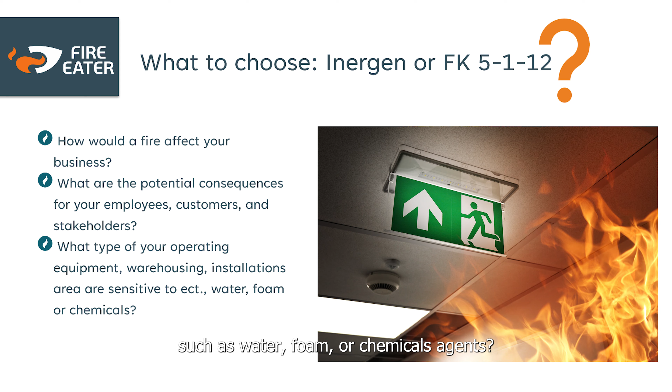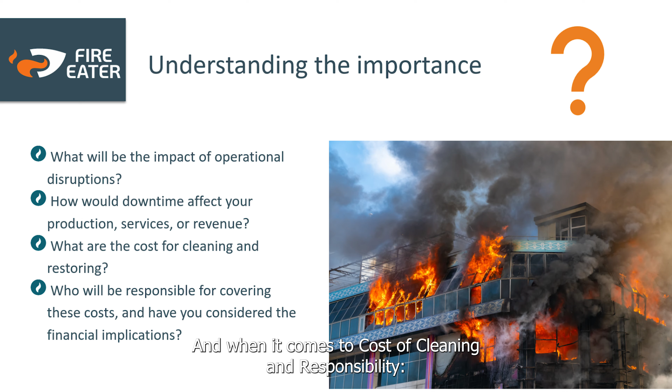And when it comes to cost of cleaning up and responsibility, what is the estimated cost of cleaning and restoring your protected area after an activation of a fire extinguishing system? Who will be responsible for covering these costs? Have you considered the financial implications? Addressing these questions will enable you to make an informed decision when choosing between Inergen and chemical agents.

Each system has its pros and cons. But before we begin to compare the two types of systems, let's start by looking into the characteristics of the systems.

And how does an Inergen system work? Inergen is an inert gas consisting of nitrogen, argon, and carbon dioxide. It's an extinguishing agent released as a total flooding method, resulting in a three-dimensional extinguishing effect.

Releasing Inergen to the protected area will decrease the oxygen content and suffocate the fire without leaving residue or causing damage, making it suitable for protecting sensitive equipment and occupied areas. It's an environmentally friendly and safe alternative to traditional firefighting methods.

And how does an FK5112 system work? FK5112 is a chemical compound and belongs to a group of fire suppression agents known as clean agents. It's designed to quickly extinguish fires in areas where water or traditional firefighting foam may be ineffective or damaging to sensitive equipment, such as computers, servers, data centers, and other critical electronic or valuable assets.

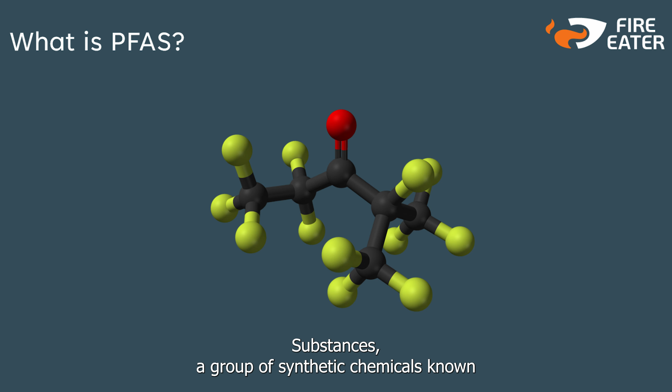FK5112 is per definition a PFAS. What is a PFAS? PFAS stands for per- and polyfluoroalkyl substances, a group of synthetic chemicals known for their resistance towards heat, water, oil, and others. They've been widely used in products like firefighting foam, stain and water-resistant fabrics, non-stick cookware, and more. However, the use of PFAS is concerning due to their persistence in the environment and potential health risk, leading to increased regulations and efforts to phase them out in various applications.

What we know for sure: PFAS will be phased out. Let's discuss the phase-out of PFAS, or per- and polyfluoroalkyl substances. As I said before, FK5112 falls under the category of PFAS. One significant development is that one of the largest PFAS suppliers has announced their intention to exit production and completely discontinue the use of PFAS across their product line by the end of 2025.

While PFAS is still allowed for certain applications, it's worth noting that the refilling and expansion of installations using PFAS may pose challenges in the future. Historically, during previous phase-outs of damaging firefighting agents, like halons, regulations became progressively stricter over time. Additionally, it's important to mention that the availability of PFAS varies by country.

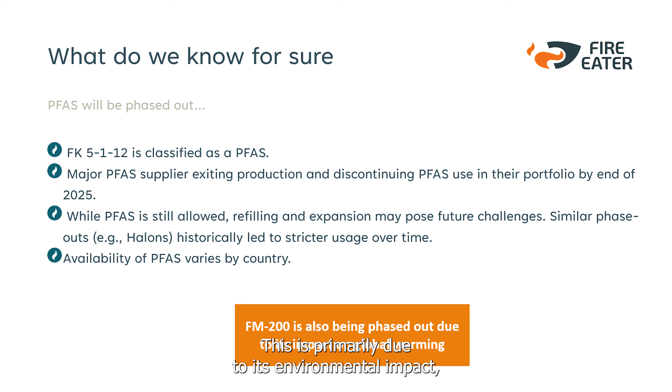Moving on to FM200, it's also in the process of being phased out. This is primarily due to its environmental impact, particularly its contribution to global warming. It has started with a 10% reduction in 2022 and will eventually be reduced by 85% by the end of 2036, according to the schedule outlined in the American Innovation and Manufacturing Act.

In-depth analysis: Inergen versus FK5112. This is a schematic presentation highlighting the similarities and differences between the two types of fire extinguishing technologies. This visual overview offers a comprehensive look at the two techniques.

Inergen fire protection utilizes an inert gas, IG541, to displace oxygen, preventing combustion. It's a gas-based suppression technique. FK5112 works by removing heat from the fire, disrupting the combustion process, and extinguishing flames.

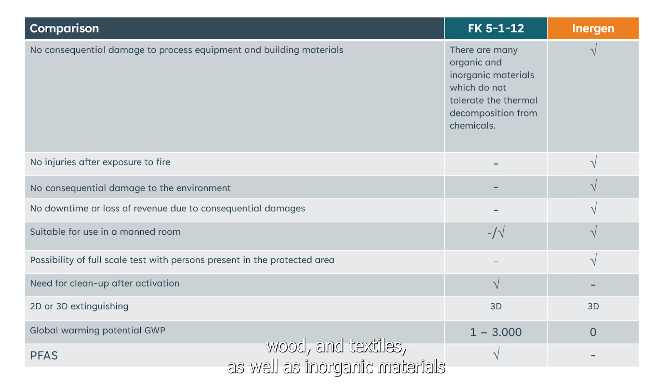Inergen systems leave no damage to process equipment or building materials, as they do not produce residues or cause corrosion. FK5112: numerous organic and inorganic materials are sensitive to thermal decomposition when exposed to certain chemicals. For example, organic materials like polymers, paper, wood, and textile, as well as inorganic materials such as metals, ceramics, and glass, may not withstand thermal decomposition under certain conditions.

No injuries upon exposure after fire extinguishing. Inergen is non-toxic, and people can safely remain in the protected area after fire suppression. FK5112 can be toxic after exposure to heat and fire.

Environmental impact: Inergen has no environmental impact and a zero contribution to global warming potential and contains no PFAS. FK5112 has environmental impact and contributes to global warming potential.

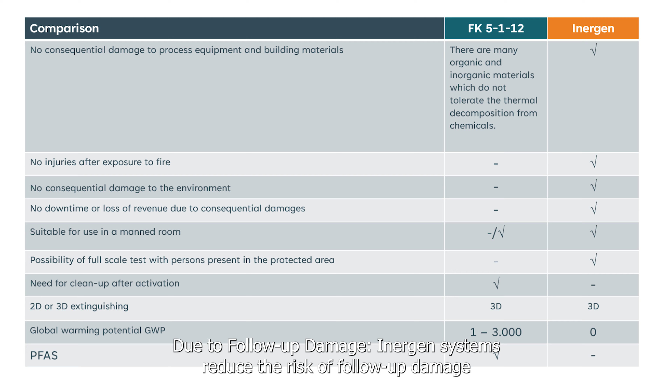No downtime or revenue loss due to follow-up damage. Inergen systems reduce the risk of follow-up damage and require minimal downtime and revenue loss after a fire. FK5112 requires cleanup and cleaning after activation.

Suitable for use in manned spaces: Inergen is suitable for use in areas with people present, ensuring their safety due to its non-toxic nature.

FK5112 is approved for use in manned spaces, but due to recent investigation that has confirmed the presence of PFAS, there are concerns about the opportunity for full-scale testing with persons present. Inergen systems allow for full-scale testing with people present, as the gas is non-toxic.

FK5112 is a PFAS which is harmful to humans, and there is a need for cleanup after activation. Inergen typically requires no cleanup after system activation, as it leaves no residues. FK5112, by contrast, does require cleanup.

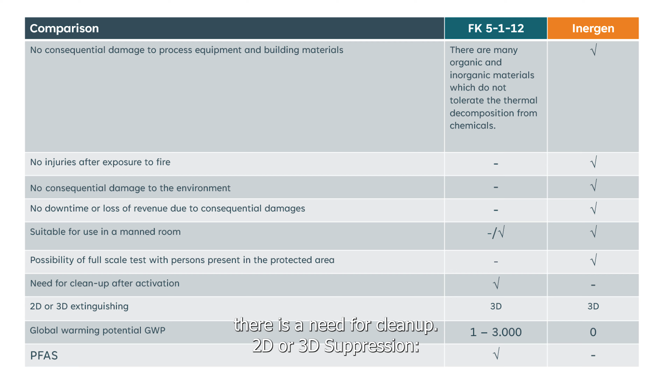Regarding 2D or 3D suppression: Inergen is a three-dimensional fire suppression solution that fills the entire room, including cabinets and server racks. FK5112 behaves in a similar manner as Inergen.

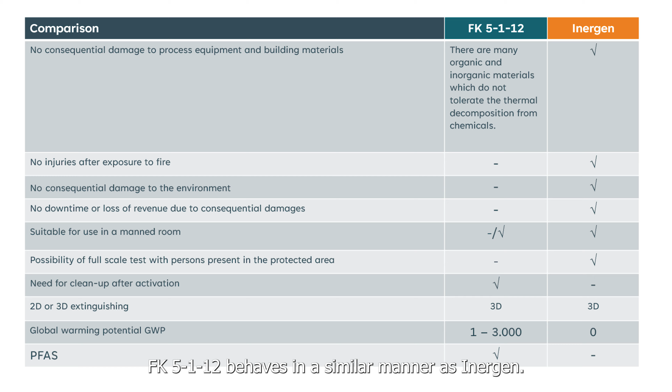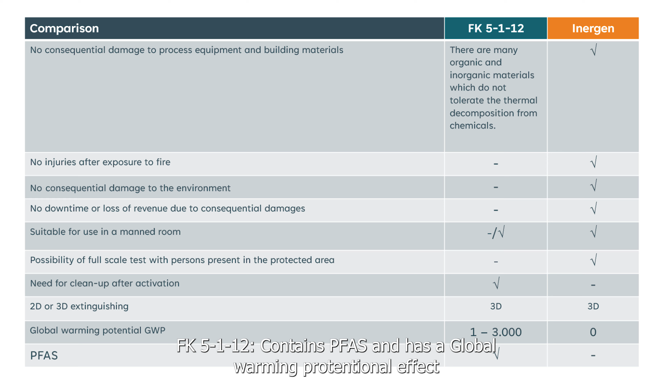On global warming potential and PFAS: Inergen has no global warming potential and does not contain PFAS, making it environmentally friendly. FK 5-1-12 contains PFAS and has a global warming potential effect of 1 to 3,000.

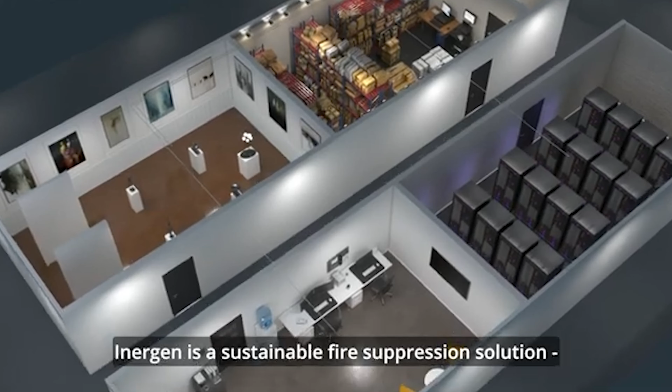Inergen is a sustainable fire suppression solution exclusively consisting of natural elements from the air we breathe: 52% nitrogen, 40% argon, and 8% CO2. A blend that extinguishes fire without consequential damage to the protected area, people, or the environment.

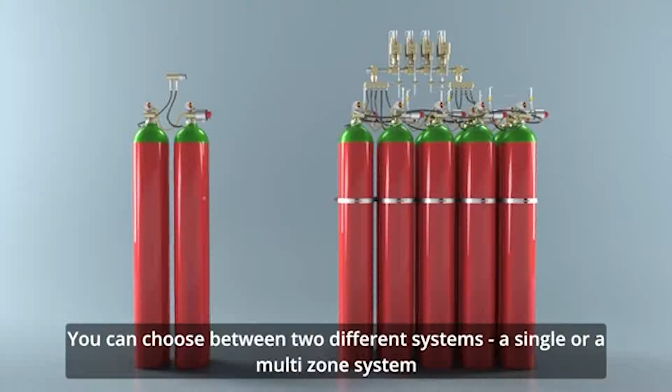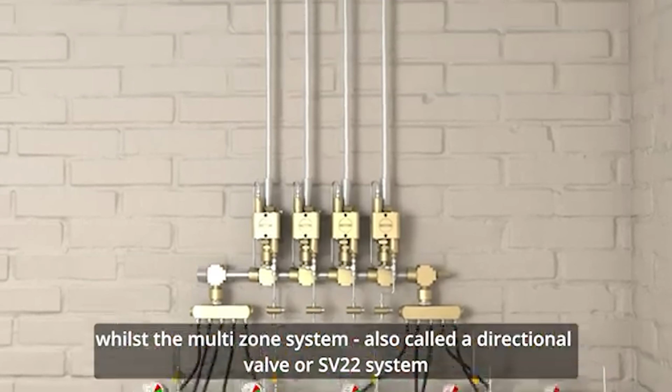You can choose between two different systems, a single or a multi-zone system, depending on the area or object to be protected. The single system, also called a standalone system, protects one single room, whilst the multi-zone system, also called a directional valve or SV22 system, protects several zones at the same time, with a shared cylinder bank dimensioned to protect the largest zone in the protected area.

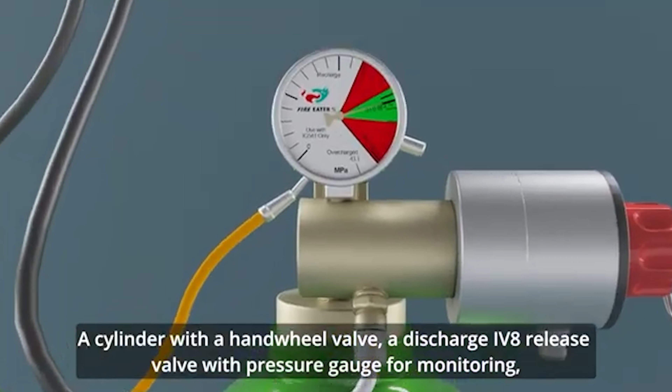The standalone system consists of a cylinder with a hand wheel valve, a discharge IV8 release valve with pressure gauge for monitoring, a solenoid with electrical activation, as well as hoses, manifold, nozzles, and pressure relief dampers. In addition, the system has detection in the form of a smoke detector, control panel, alarm tableau, and discharge call point.

In the event of an alarm on one of the two detectors, the ventilation in the room ceases immediately, while the alarm is awaited from the second detector in the room. After activation of the second detector, the system will start a preset countdown.

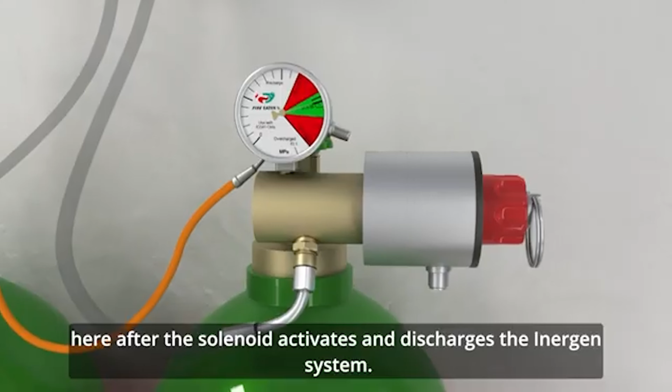After the solenoid activates and discharges the Inergen system, the Inergen will be released from the IV8 discharge valve and will travel through the discharge hose up to the manifold. Activation of the remaining cylinders will occur through back pressure from the manifold. The Inergen is discharged through a network of pipework to provide a uniform concentration of Inergen throughout the risk.

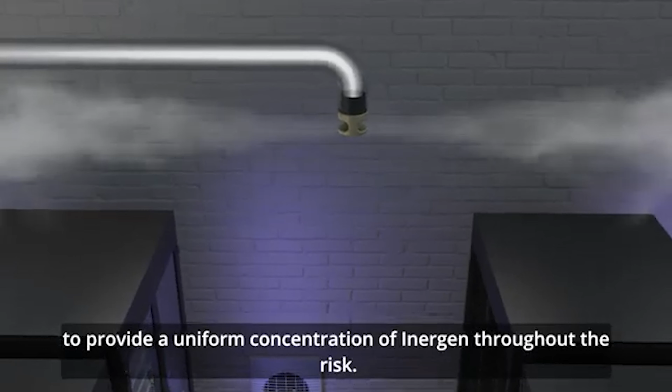In addition to the components in standalone, the SV22 system consists of a series of zone valves and an SV-CIV starter kit. In the event of an alarm, the SV22 system's first actions follow the same procedure as the standalone system until the Inergen system is activated.

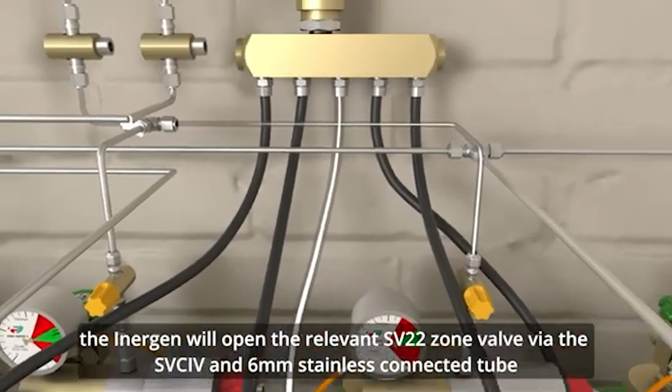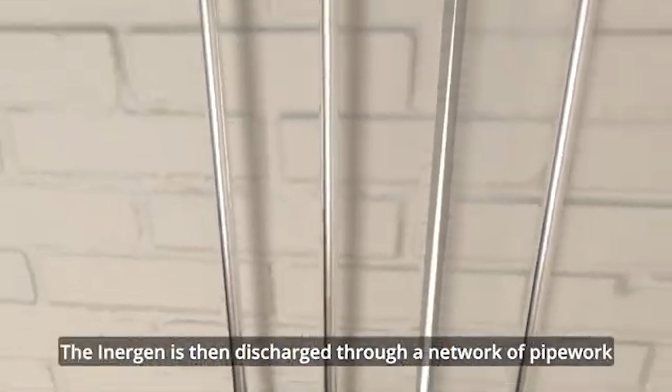Subsequently, the Inergen will be released from the IV8 discharge valve and will travel through the discharge hose. The Inergen will open the relevant SV22 zone valve via the SV-CIV and 6mm stainless connected tube, and thereby open the correct zone SV valve. The Inergen is then discharged through a network of pipework to provide a uniform concentration of Inergen throughout the risk.

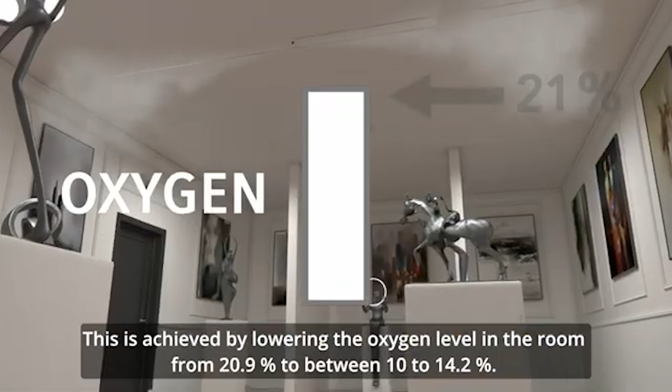It typically takes 40 seconds to extinguish the fire. This is achieved by lowering the oxygen level in the room from 20.9% to between 10 and 14.2%. The Inergen concentration is held within the risk, leaving no chance of further reignition.

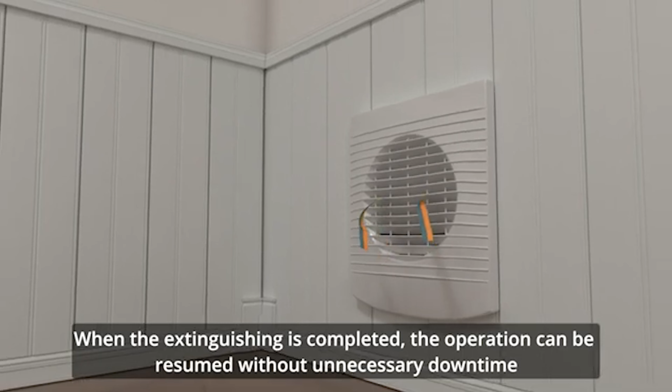When the extinguishing is completed, operation can be resumed without unnecessary downtime and consequential damage to either inventory or the building. Most importantly, the Inergen system is completely safe for people. After a fire, the standalone and the SV22 system can be easily restored, so that it is ready next time an incident could occur. Fire Eater: no fire, no danger, no damage.

Pros and cons of Inergen fire extinguishing systems: effective and reliable in confined areas. Inergen extinguishes fire by lowering the oxygen level in the protected area from 20.9% to around 12.5%, depending on local rules. The low oxygen level suffocates the fire before it develops.

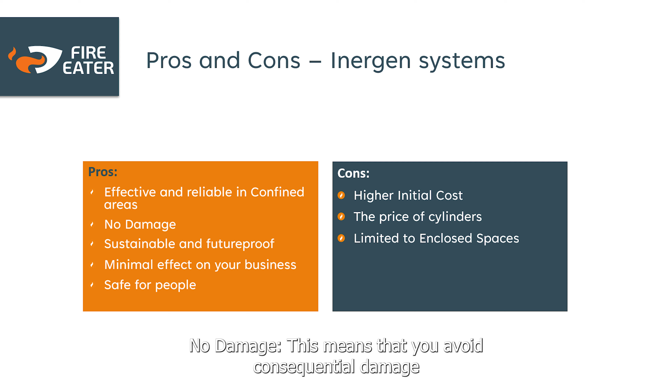No damage: this means you avoid consequential damage to building, interior, stock, data and process equipment, etc. Sustainable and future-proof: Inergen consists of natural gases. There's no impact on the environment when a system is activated, and no chemicals are used. This makes the greenhouse effect neutral, without any kind of impact on the ozone layer. We call this a sustainable solution, which also makes it future-proof.

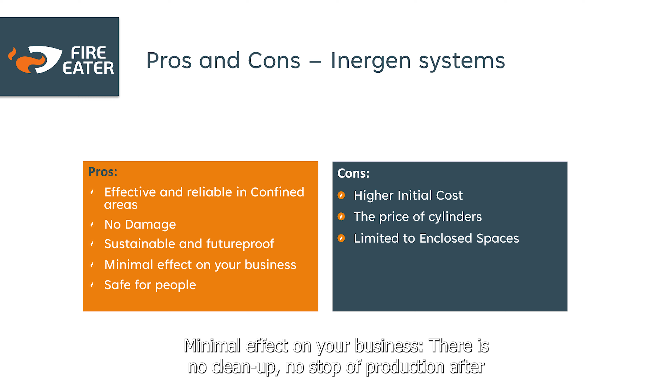Minimal effect on your business. There's no cleanup, no stop of production after an activation of an Inergen system.

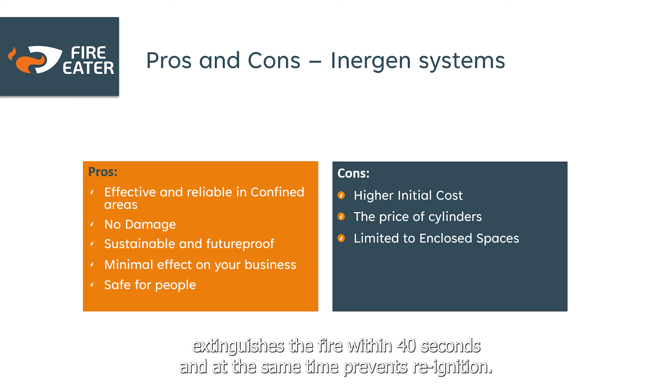If a fire occurs, the Inergen system is activated automatically and typically extinguishes a fire within 40 seconds, and at the same time prevents reignition. We recommend that you ventilate the room afterwards, and when this is done, you can continue as if nothing had happened.

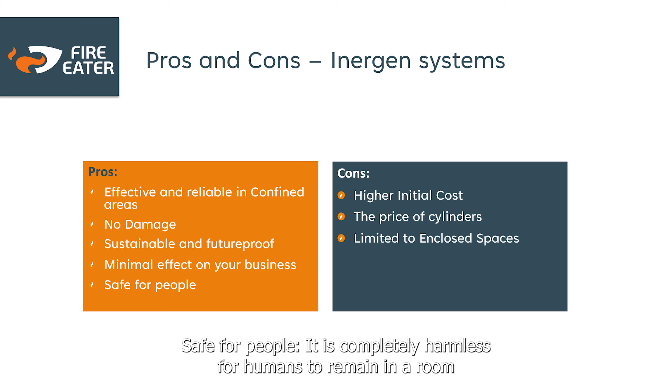Safe for people. It's completely harmless for humans to remain in a room when an Inergen system has been activated. You may find that you breathe a little deeper than you usually do. This is because your brain wants the same amount of oxygen as before the system was activated and the oxygen level lowered. It happens completely automatically, and most people don't even notice that it's happening.

Cons. High cost. Inergen systems can be expensive to install and maintain compared to some other fire suppression options.

Complex installation. Installation can be complex, and the system must be carefully designed for specific hazards.

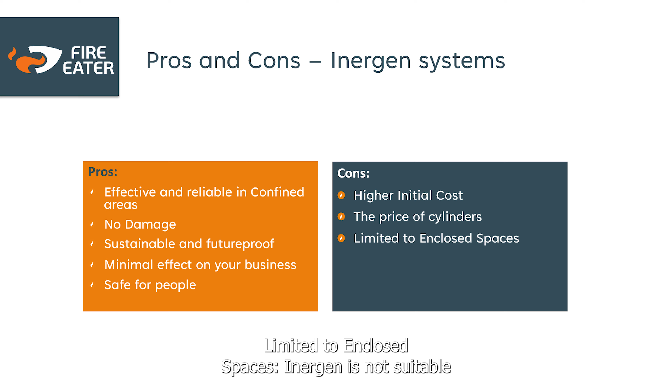Limited to enclosed spaces. Inergen is not suitable for open spaces where the gas disperses before suppressing the fire.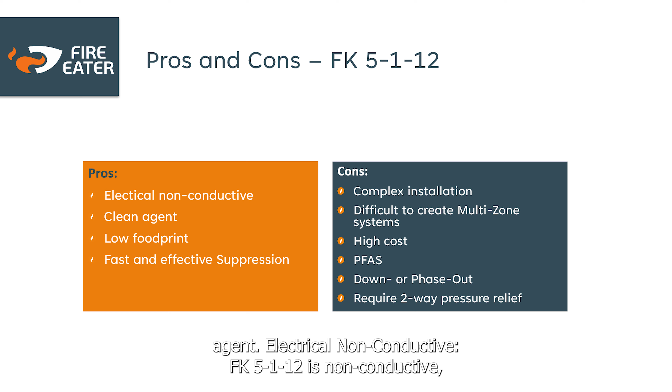FK5112 fire suppression system. Pros. Let's look at the advantages of FK5112 as a fire suppression agent. It's electrically non-conductive, meaning it won't harm or damage electrical systems during discharge.

This feature ensures the safety of both people and valuable equipment. It's true that it's non-conductive in its pure form. However, when exposed to heat, it produces a cocktail of unpleasant chemical compounds, including hydrogen fluoride. It becomes electrically conductive, so it's not recommended for securing battery rooms.

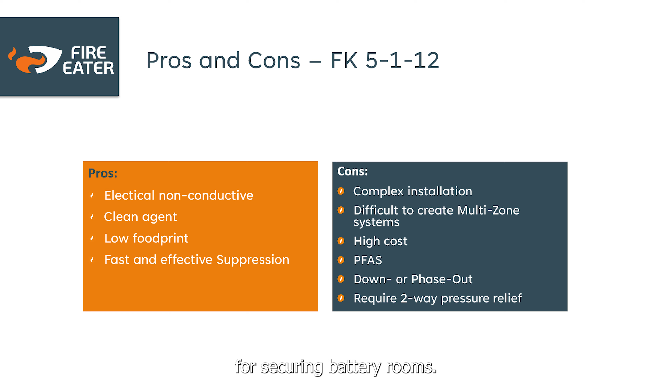Clean agent. FK5112 is a clean agent, which means it doesn't leave behind any residue or damaged surfaces after activation. This is crucial in environments where cleanliness and minimal post-fire cleanup are priorities, such as data centers and laboratories.

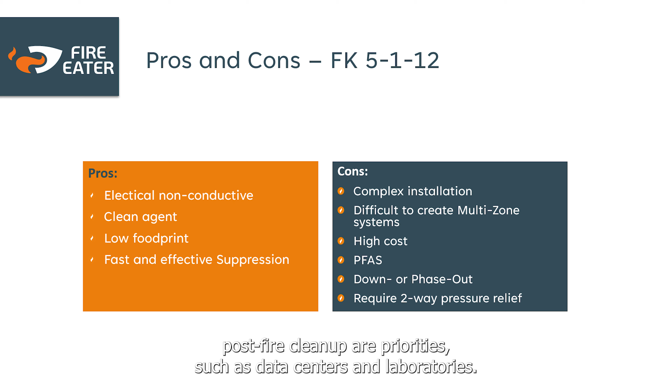Here is the same issue, that it reacts when exposed to heat. It produces a cocktail of unpleasant chemical compounds, including hydrogen fluoride.

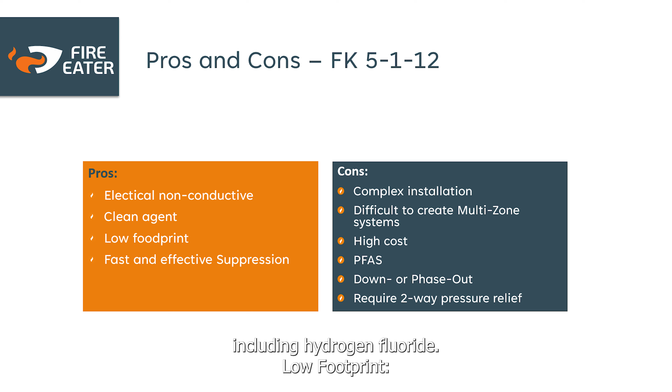Low footprint. The cylinders do not take up a lot of space in the room, but they need to be close to the protected room. Fast and effective suppression. FK5112 is known for its rapid and effective fire suppression capabilities.

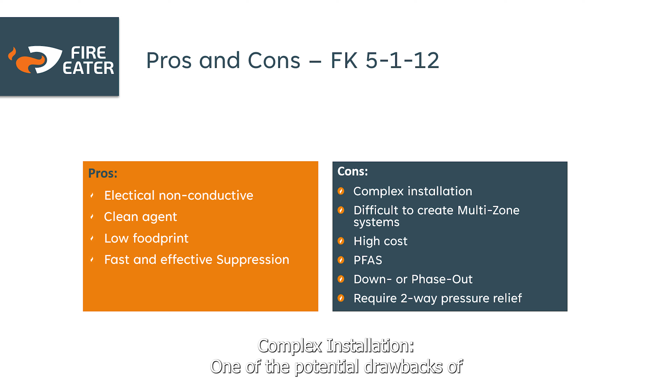Cons. Now let's discuss some of the challenges and drawbacks associated with FK5112 as a fire suppression agent. Complex installation. One potential drawback of FK5112 is that its installation can be complex and may require careful planning. Ensuring that the system is set up correctly and effectively can be a detailed and sometimes time-consuming process.

Difficult to create multi-zone systems. Creating multi-zone fire suppression systems with FK5112 can be challenging. This can limit its suitability for larger or more complex facilities where zoning is critical for targeting specific fire hazards.

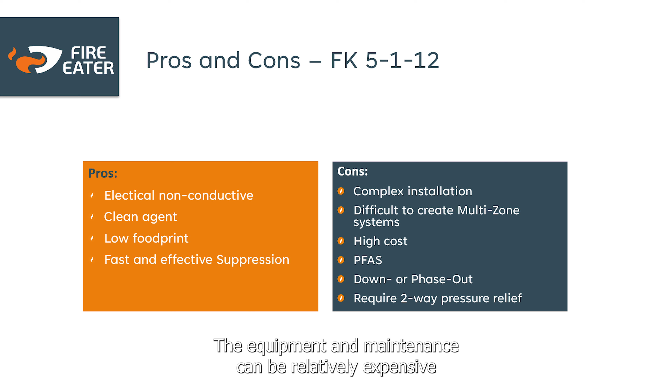High costs. Another consideration is the cost associated with FK5112 systems. The equipment and maintenance can be relatively expensive compared to some other fire suppression options, which may not be budget-friendly for all organizations.

PFAS concerns. FK5112 is categorized as a PFAS. Due to growing environmental and health concerns related to PFAS, its use may come under scrutiny, and regulatory changes could impact its availability and use.

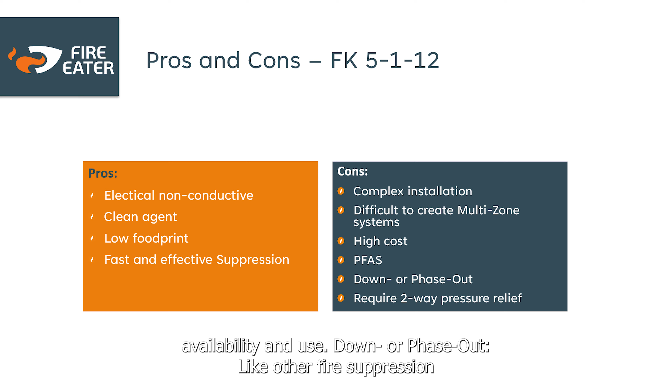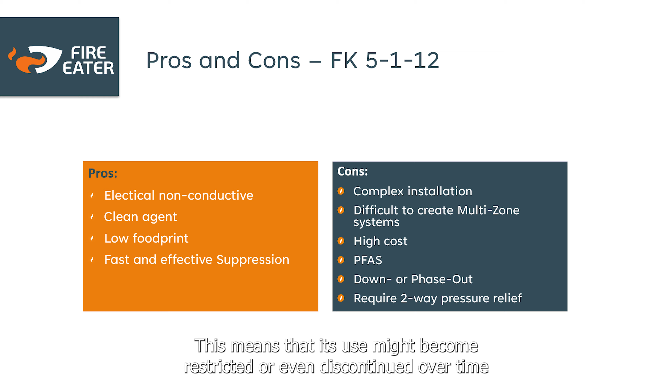Down or phase out. Like other fire suppression agents, FK5112 may phase down or even be phased out in the future. This means that its use might become restricted or even discontinued over time due to environmental or safety concerns.

Requirement for a two-way pressure relief. FK5112 systems typically require a two-way pressure relief system to ensure the safe operation of the fire suppression system. This additional component can add complexity and cost to the overall system.

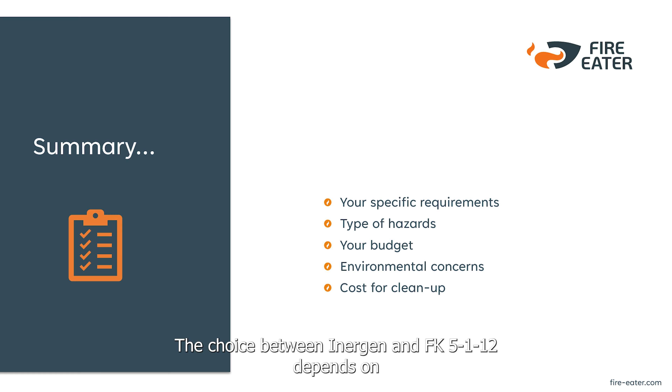We have now reached the end of this webinar, and I hope it has given you some thoughts to consider or answers regarding your choice of fire protection solutions in the future. The choice between Inergen and FK-5-1-12 systems depends on specific requirements, including the type of hazards you need to protect against, your budget, and your environmental concerns. By choosing FK-5-1-12, you also need to consider the cost of cleaning up.